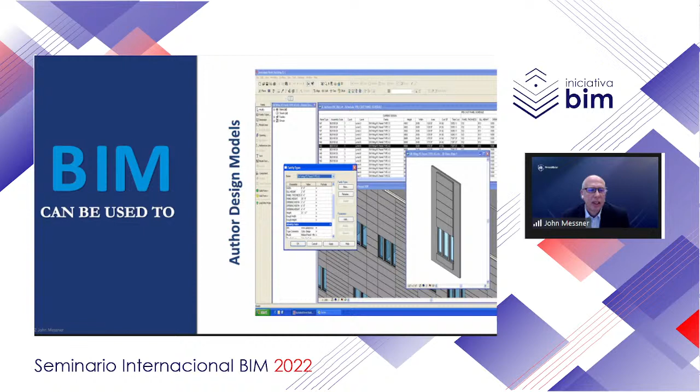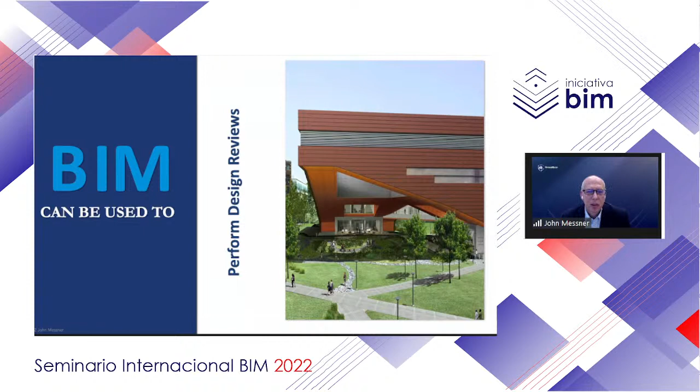We can then do things like perform design reviews. This is one of our buildings here at Penn State, built a little more than five years ago now, where we leveraged BIM for many different use cases on the Millennium Science Complex. This is one of their design models that we reviewed in a large immersive display system here at the university. We can also perform 3D coordination.

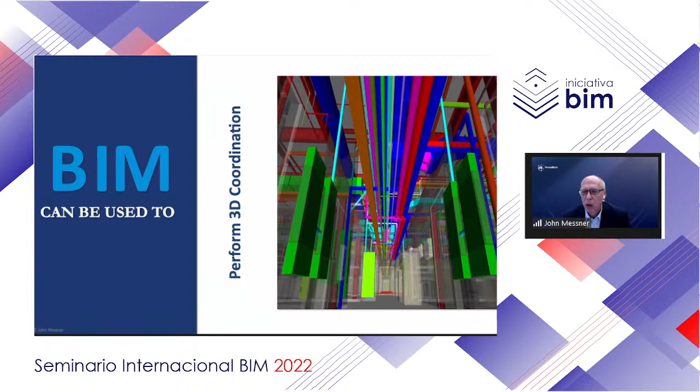Certainly some of the lowest hanging fruit of finding value in BIM is to be able to leverage these models, be able to perform coordination and avoid field conflicts that we all know are extremely costly, as well as overall reducing the performance on the project when people have to move one item if it's in the wrong location.

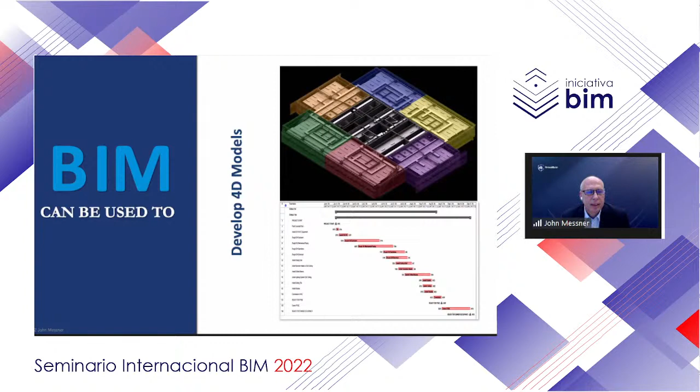And we can also do time sequenced or 4D models to look at overall project phasing, to evaluate detailed construction sequencing. This is just a really high level 4D model here looking at phasing. Certainly we've seen many examples of much more detailed construction sequencing and how we can then find conflicts in our schedule and really optimize the installation sequence of those elements.

We can perform detailed engineering analysis. This is one of the great things about BIM once we've developed design models, is to be able to leverage those models to do daylighting, energy models, structural design, and many other types of engineering analysis. We often have challenges with our interoperability associated with doing some of these tasks, and I think that's one of the things that we continue to seek opportunities to improve.

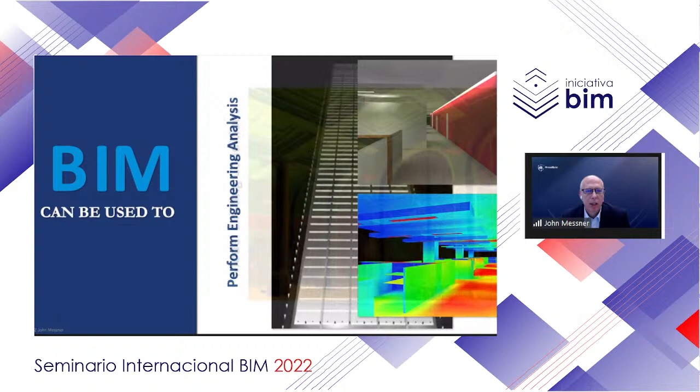Another popular use case for BIM is to leverage some of our reality capture technologies to create existing condition models. We can use laser scanning, photogrammetry, or simply just author an existing condition model off of a survey. But I think the ability for us to represent what is actually out in the field in an accurate way is an important use case for BIM. It frequently starts some of that process.

But as we get toward the end of the delivery phase and moving toward the operation phase, I think one of the key uses of BIM is to develop and document a record model. What we're now starting to look into is really transitioning from the delivery to having more of an operational digital twin, having this representation where we can maintain the information that we need in this operational model, to use both in operations as well as to leverage for future renovations and retrofit.

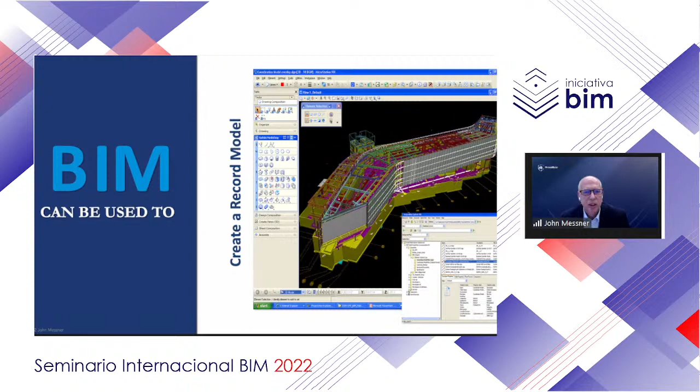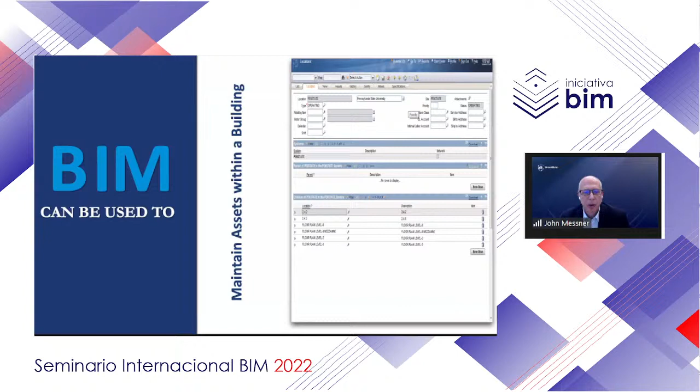And then ultimately, we can also leverage that information in the overall asset maintenance and operations processes. This is just a simple view from our asset management system that we use here at Penn State. What we're doing now is we're taking our building information models that we get from our delivery teams here at the university. We have an asset list of all of the components and attributes of the assets in the building, and we bring that information directly into our asset maintenance system so that we can leverage that information as we move forward. And so that's just a number of the use cases that we can leverage when we look at building information modeling and building information management.

I guess the key question is, why do we do this? I just put up a couple of the reasons that I think are most important for why we would leverage BIM throughout the life cycle of a project. Some of the things that we've seen within our own facilities group, as well as many who have performed research in this area and have case studies and documentation of these benefits of BIM adoption, are to reduce both the initial cost and the overall life cycle cost of our building, hopefully getting better quality.

I think BIM has also been shown, when effectively planned and implemented, to really increase efficiency of our delivery process. I think that can be really valuable. We've seen some great examples of leveraging this information for safety purposes, both design for safety, as well as overall monitoring of the construction and maintenance process. I think it's been shown if we can leverage this information for analysis, we can create more sustainable buildings. And overall, this BIM process can support and enable additional innovation on a project.

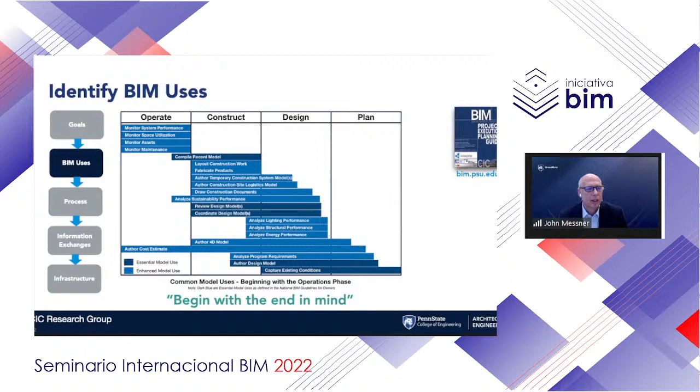And the next step that we looked at is once you identify your BIM uses, then to put together the overall process and design this process. In this diagram, the boxes on the top are our overall BIM uses, and the items on the bottom are the information exchanges, essentially identifying, when one entity performs one of these BIM uses, what's their output or their information exchange that's going to go to the next follow-on use case. And so I think it's just important for teams to think about this process and to think about where their information will be going and what the follow-on procedures and people will use that information for in the future.

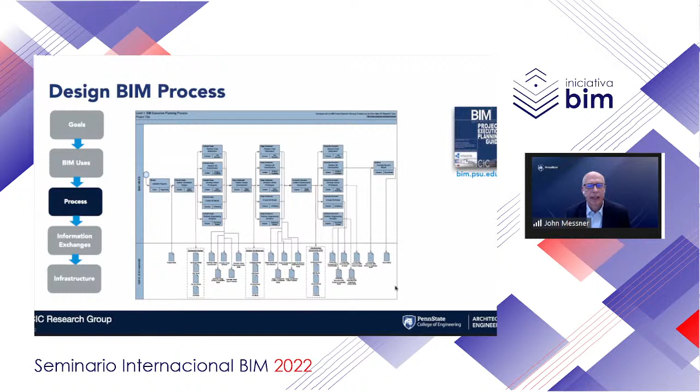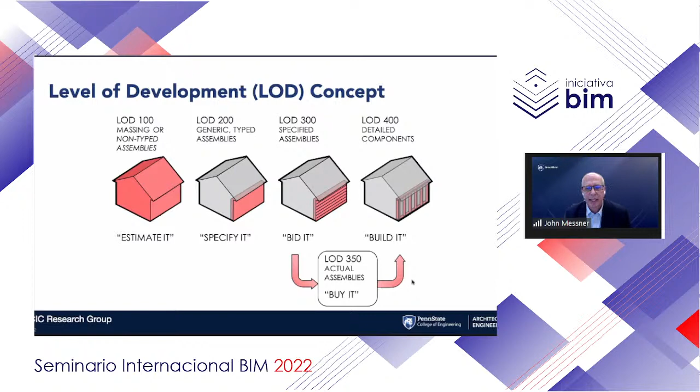This diagram just shows the BIM Forum LOD specification, which has 100, 200, 300, 350, and 400, going from an initial massing to overall detailed components that we would build and then ultimately document in the as-built model. These are all documented in the BIM Forum LOD specification, which is also a freely available resource

to everybody. And the last item is to really design the supporting infrastructure around the process. We put this as the last step in the procedure to make sure that teams think about their process and their information exchanges before they think about some of the more detailed items, like what kind of computing infrastructure do I need? What kind of meetings do I need to have? And what quality control processes and procedures might I put in place?

We essentially documented these infrastructure items in a templated BIM execution plan. We're in the process of updating this template and this list of information needed for this infrastructure in our ongoing efforts for the National BIM Standard. We developed this procedure more than 10 years ago now. We put it out into the industry and got a lot of feedback. By the way, we worked with some great team partners on this, the U.S. Army Corps of Engineers, our own facilities group here at Penn State, as well as a number of other great teams to implement this procedure on their projects and give us feedback.

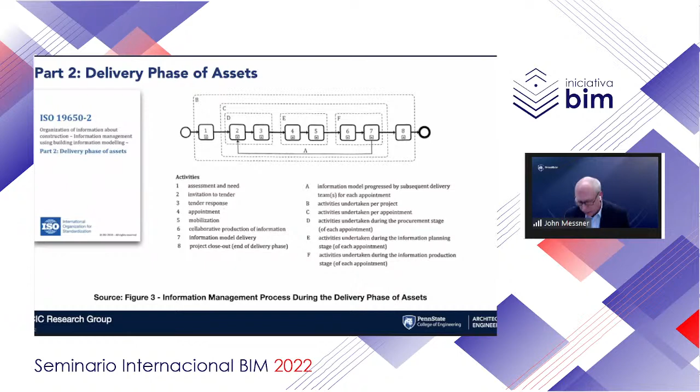I want to focus on the delivery phase because that was really the focus of the BIM execution planning procedure: how we organize the delivery phase so that a project team can efficiently deliver a project, as well as efficiently deliver the information from that project to be transitioned to the owner. ISO 19650 Part 2 outlines this delivery process. I'm going to switch images here, but these are the 8 steps in the ISO standard, and I'm going to bring up a diagram that has those same 8 steps, just visually organized a bit differently.

Interestingly, within the ISO standard, they did redefine what a BIM execution plan is. I have to admit, this has caused some discussion and debate within our US National BIM Standard initiatives about what exactly a BIM execution plan is and what information should be contained within that plan at various stages throughout a project. So ISO defined the BIM execution plan as a plan that explains how the information management aspects of the appointment, and an appointment is essentially a scope of work between the appointing party and a lead appointed party.

And so this is essentially a contract in some of the terminology that we would use between an owner and one of the key project delivery team members, whether that's a designer or constructor on that project. And so the BIM execution plan in ISO really says that this is an information management aspects associated with the appointment that will be carried out by the delivery team.